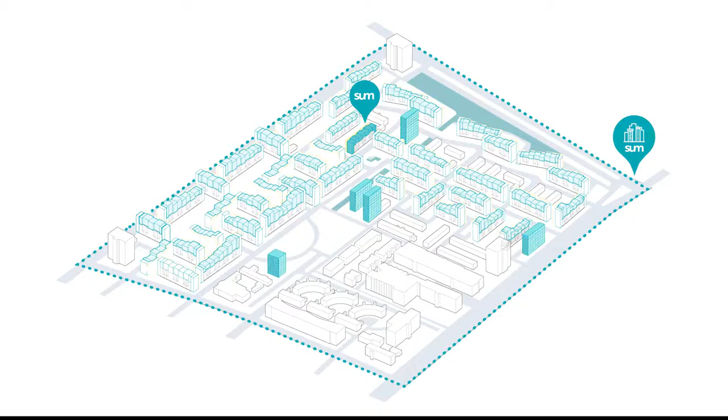By renovating and adding an average of 2 building layers to the existing structures, we can meet the estimated housing demand of The Hague by 2030, whilst keeping the existing community intact and even improving the quality of public space. As a result of our research, SUM chose to design a top-up addition and renovation to these tenement flats, as we believe this is the best way of showing symbiosis in our design, and this process can be applied to many other buildings in similar situations.

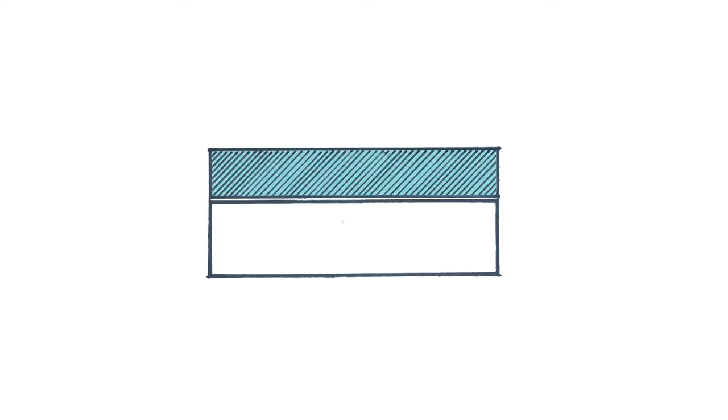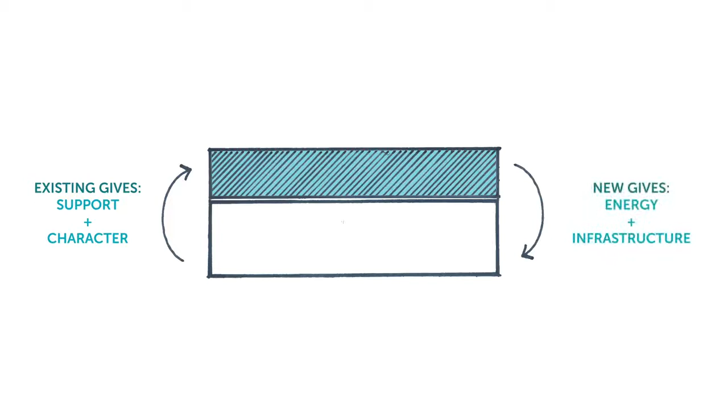The strategy focuses on redevelopment through symbiosis. This means that we are creating a symbiotic relationship between two elements, the existing building and the new construction. The existing building provides the foundation for our design, and most importantly, the support for the top-up. The top-up provides new living opportunities, as well as new infrastructure and energy.

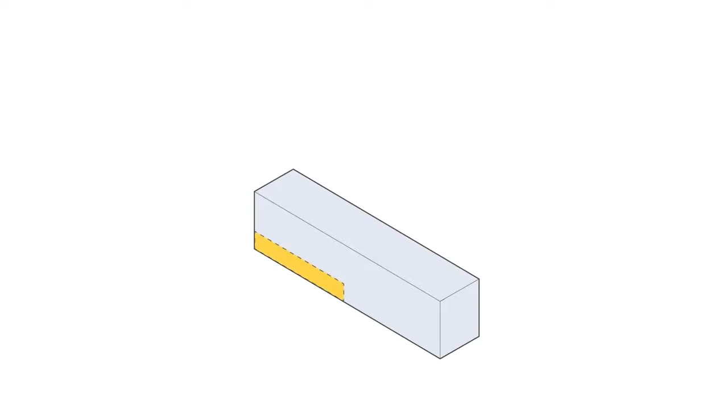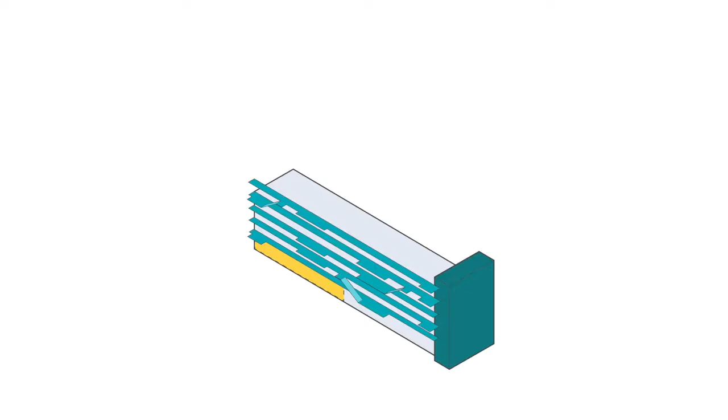Symbiosis is seen through 6 main aspects of our design. 1. The activation of the ground floor through new public functions. 2. Better accessibility through a mixed-function circulation core with an elevator. 3. The incorporation of a gallery which connects residents together. 4. A renovation of the existing units with an improved layout and sustainable building performance. 5. The addition of modular top-up units. And 6. A productive roof to cap our design.

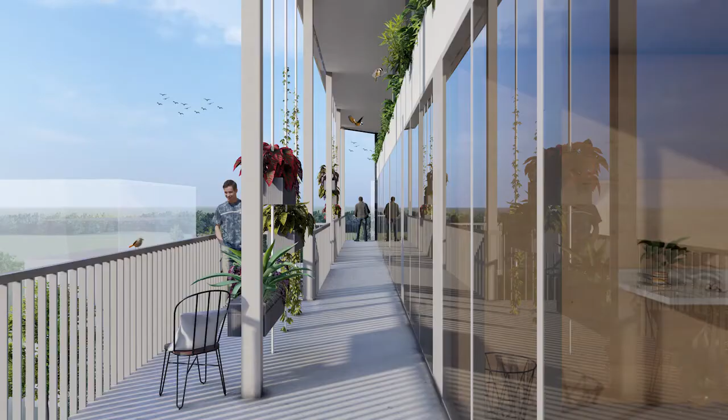On the most prominent side of the ground floor, we located public functions that interact with the neighborhood. We will offer a restaurant with locally sourced produce, a makerspace, and a community space for the residents and neighbors. To improve accessibility for the residents, we've placed a multifunctional circulation core on the end of our building. With a communal staircase and elevator, this core centralizes the circulation of both the existing and the top-up residents. In this way, residents can more easily interact, increasing their community relationships and symbiosis.

The top-up addition is the energy hub for the entire building, and its roof is the main generator. The large area of the roof is also used to collect rainwater that runs down rain chains on the gallery and irrigates surrounding planting. Residents aren't the only inhabitants of the new renovation. Its angled roof provides a sheltered space to improve biodiversity.

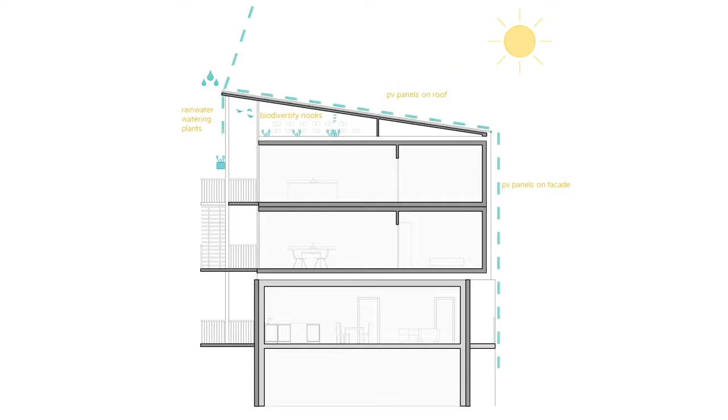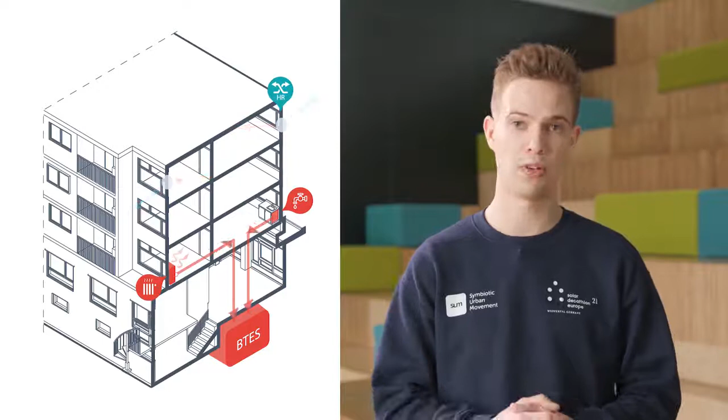So how do we transform these existing gas-using buildings that lose a lot of heat into future-proof homes? We start with the reduction of the energy demand by wrapping the building in a layer of insulation and replacing the windows. We also add sun shading on the south facade to prevent overheating in summer. After this, we reuse as much energy as possible. We do this by reusing the hot water from the shower, washing machines, radiators and floor heating. We also recover the heat from the outgoing ventilation air.

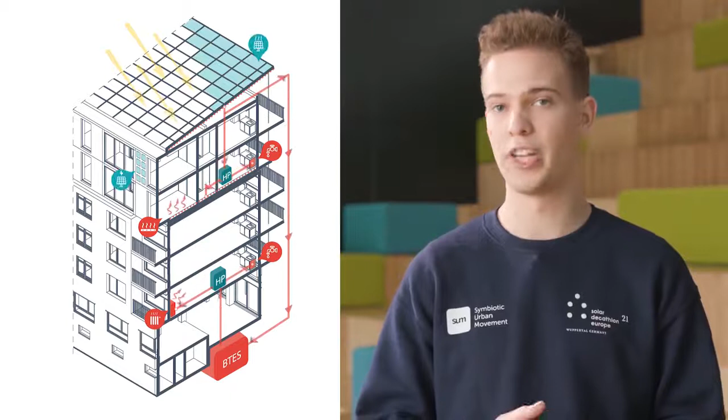After this reducing and reusing of the energy, we produce the rest of the required energy in a sustainable way. Our top-up acts as an energy hub for the whole building. Hot water is produced by heat pumps and PVT panels on the roof of our top-up. These PVT panels, together with our solar facade of the top-up, also create all the electricity that we need.

People are the center towards a more sustainable future. Our behavior and the development of sustainable living habits are key in making this happen. So let's make a change. Let's live in symbiosis. Let's live better together.